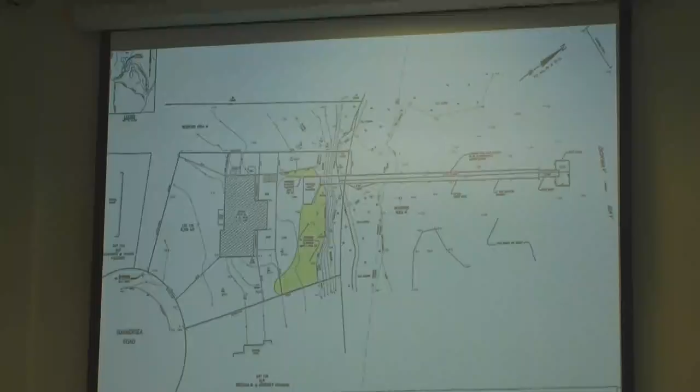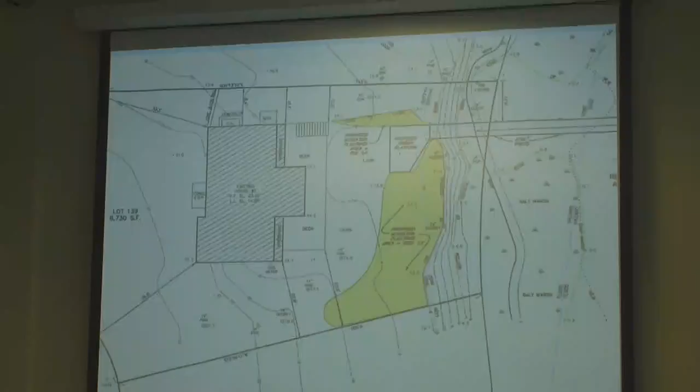And the previous plan shows the mitigation area there highlighted and the platform area. And again, just a close-up of the mitigation. But there was no detailed plan at the time as far as what the mitigation is comprised of. So that's what you have before you tonight, this plan that actually shows a detail of what's to be proposed.

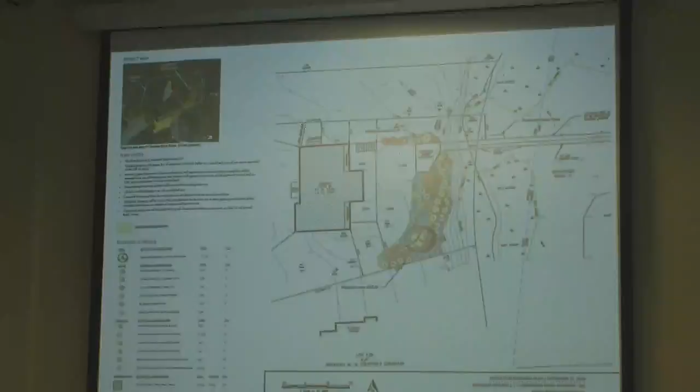If the commission finds it acceptable in exchange for a platform that is wider than 4 feet, which exceeds the requirements under dock and pier fixed pier width. The difference in this particular application compared to an application that has a deck halfway down the walkway or something similar out over the water, out over the BVW, out over the bank, is that this is landward of all of those resource areas, in an area that is currently just grass and turf.

So in looking at this, I think the reason the commission afforded an opportunity to look at a more detailed planting plan in exchange for this, even though it's not really something you've approved in the past, is that the exchange in this case may result in a real net benefit of providing a buffer to the top of Coastal Bank where there just really isn't any currently. So that's just to bring you up to the current proposal before you.

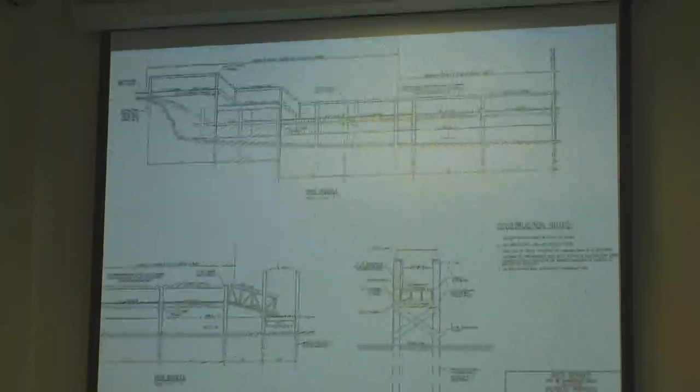And I agree, the planting list looks good. It's all native species and then a mix in of pollinator species. So overall, certainly a comprehensive list of mitigation plantings. And given what the impact would be from this platform, which is really negligible in my opinion, to what you're getting in exchange...

Is it permeable? I don't know. The platform, the decking will be the same decking that's on the walkway to the dock. It'll have gaps in the planking. There's no wetland vegetation under it, so it would just be standard decking like any residential deck, 3/4 inch spacing. You're not really protecting anything underneath it except lawn, so the spacing really comes into play when it's going out over resource areas like that. Oh, I'm just wondering if it's permeable, that's all.

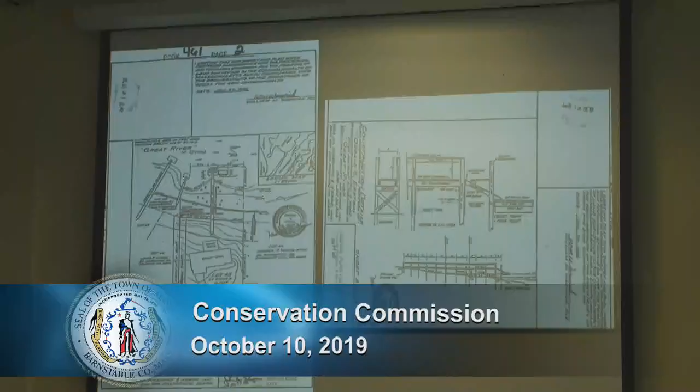That's not enough room for separation from the dock on the salt marsh, from the mean high water mark, the high tide line. That's the standard, that's the area where access is granted to the public. If you can't get underneath a structure, provisions have to be made to get up and over it, via access stairways on either side, removal of railings to allow public access up and over the dock and get by it without going around into the water. That's why it's at mean high water.

You need to add stairs to the dock so they can come up and walk over it. Correct.

Do we know when Mr. Cleary will be home from Florida? He's coming back, we're supposed to close on the 28th, so he's coming back, I think, the Thursday before that, so the 24th or something. So we should be back before our next meeting, should we choose to continue. When is the next meeting? Next meeting is two weeks hence.

October 24th, correct. I think he's coming back around then, but he did give me some stuff, I apologize I was late getting here, I ran from Boston, and I have some things he gave me at the house, so it's possible the registrations you're talking about are there, and could I bring them up to you?

Yeah, absolutely, we can review what documentation you have. If it's there, great. I would still recommend a continuance to allow time for that. Yeah, that would be great. So I'll bring you that documentation, and then how do we deal with the stairway thing?

So the commission, it seems kind of an odd approach under Chapter 91 to wait for somebody to file a complaint against a homeowner for lack of access. If that occurrence were to ever happen, it may be remote, it may not be, but it seems extreme when the commission can simply require access up and over to avoid that scenario. That's what I would recommend.

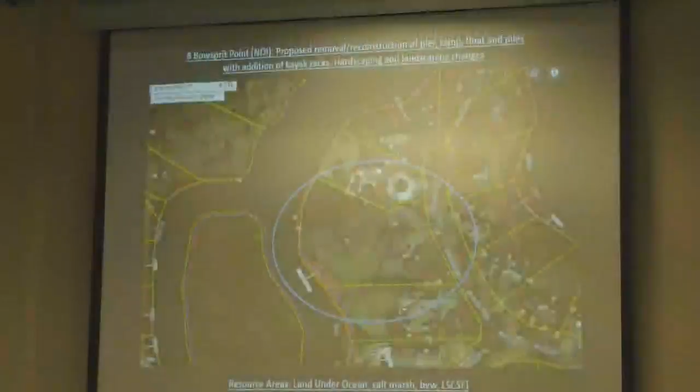Just to give you a quick recap, your resource areas for this project include land under the ocean, salt marsh, BVW, land subject to coastal storm flowage. This is a flood zone, this is an A zone. We're not in a velocity zone for this area.

Then there will be a retaining wall in this area. The walkway will extend to the top of the retaining wall, and then there'll be a set of steps down to the lawn area. You can see these stakes, I believe, are the BVW line. That wetland line actually is in the lawn area.

Prior owners had done this work, and there is an open order of conditions on the site for Phragmites eradication plan. This work was initially resolved through the order of conditions, and they are ongoing with the Phragmites eradication plan. It is effective at this point in eliminating the Phragmites in this area.

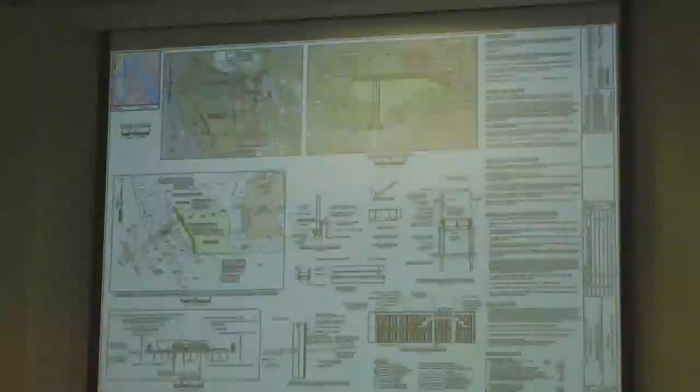What is the estimated height of the wall that you propose? It's about 26... 46 inches high. Good, just walking that property, clearly you need a good couple of feet. It's pretty low in there, and that Spinnaker Cove, when it floods, and probably this evening, you'll probably find that the water is up, or depending upon tides, will flood several feet up onto that lawn.

So I think this is a good proposal. So what makes it okay to put in a retaining wall where there isn't one now? Well, the purpose of the wall is really to protect for storm damage prevention. That's the key purpose of the wall.

So there was a letter from Marine Fisheries that commented on the dock, and they made known their concerns about migration of salt marsh and BVW in anticipation of sea level rise. So where the wall was originally located, I had recommended that it be pushed back to its current location. I think by virtue of doing that, you're getting it out of BVW. You're allowing for that sea level rise and salt marsh migration to happen naturally. You're eliminating lawn that was, for the most part, covering over BVW.

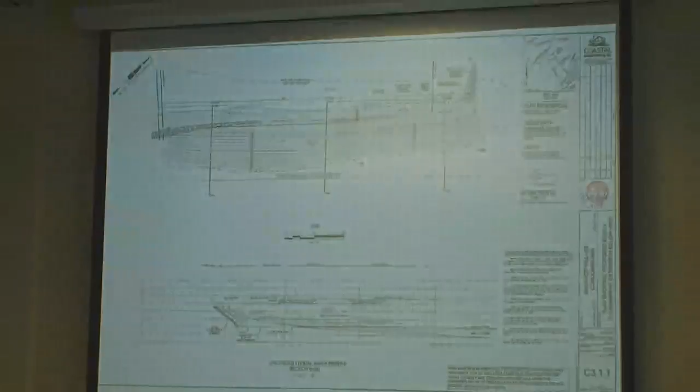The green line shows a flat section of the beach known as the berm with a 3-to-1 slope out to the water. From our experience, we've seen a 3-to-1 slope can cause a scarp over the beach because the steep slope allows the sand to fall off, and as water hits it, it's almost like hitting a wall, causing more erosion. We've designed a new profile with a 1-on-10 slope down below the mean high water line, which allows water to move up and down the beach and hopefully limits erosion.

The new profile compared to the green profile from 1995 kind of balances out the amount of nourishment that would need to be placed. I was able to generate that original profile, the green line, on the computer program and figure out how much volume would be required to fill that template. I redesigned a new template with a more gradual slope that we've had more success with in beach nourishment projects, and I tried to maintain that same volume.

The volume to the original profile was about 13,900 cubic yards, and the new proposed volume is about 14,200 cubic yards. Another thing I wanted to make a point of is that the condo association is going to continue to at least place their required nourishment every season based on the survey. They're also very concerned with the status of their beach, and they've called it the pride of their property and their most valuable asset.

They want to do anything they can to maintain the beach and keep it around. So there might be some years where a lot of nourishment is needed to redevelop this proposed profile. There may be some years they want to place the full quantity to reconstruct the beach as shown here, some years they just stick with their minimum requirement, and some years the beach may naturally gain sand, but more likely than not there's going to be a loss of sand.

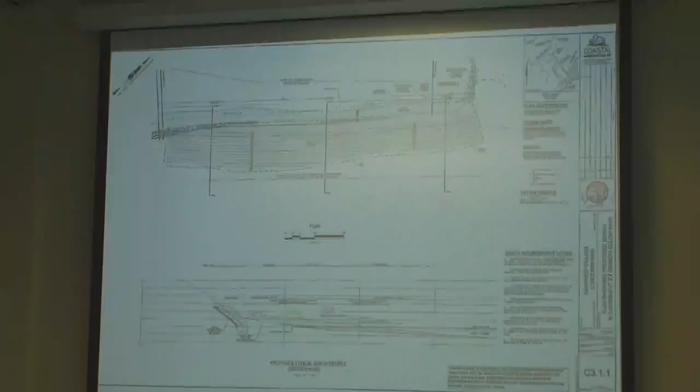Just to add on to the input on the regulatory authorities for this. This was issued a DEP number, so it was opened. Also, two state agencies, Division of Marine Fisheries and Natural Heritage and Endangered Species Program, submitted comment letters for this. Marine Fisheries identified the area as not containing shellfish, which is their primary concern, so they signed off on it.

Natural Heritage and Endangered Species Program also issued a letter of no-take status regarding shorebird habitat, their species of special concern out there. In fact, the letter mentioned that the addition of sand into the intertidal area below mean high water would actually be a net benefit for shorebird habitat. So they also signed off on this project.

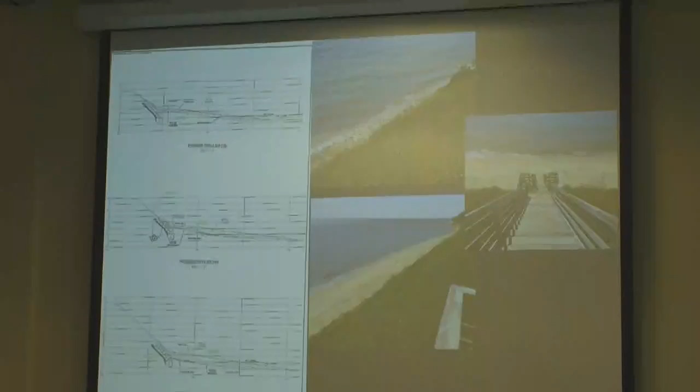As it meets the beginning of the series of revetment walls on Triton, that's really where the profile is almost gone. It's just a matter of time, if nothing is done, that the mean high water will reach the base of the wall and the profile will be gone, and you can't reestablish it after that. So I think it's definitely an improvement, and these measures will hopefully help reestablish the profile, particularly in that area, and save the profile of the beach moving forward.

So all relevant agencies have signed off on this, and I don't have any other comments. I would recommend we close and issue.

Does anyone in the audience have any comments or questions?

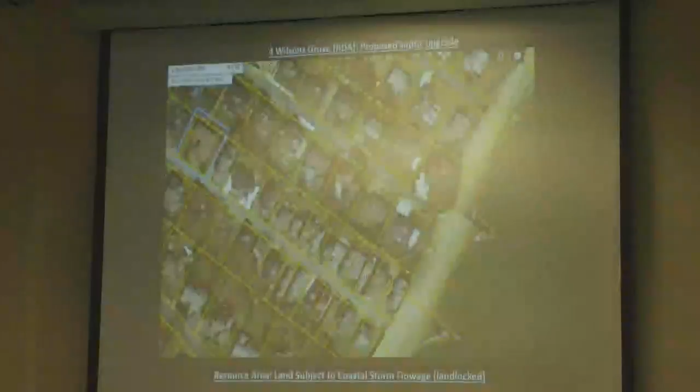So Board of Health has received the application under review. Just like was described, it's a landlocked lot in the flood zone. Going back to the satellite, you can see it's pretty set, well outside of any other resource areas, which would be coastal bank, coastal beach, coastal dune. So it's simply land subject to coastal storm flowage. All work being contained within the driveway layout as was described, and just some photos to show that area.

Does anyone in the audience have any comments or questions? Motion for negative determination for the proposed septic system upgrade at 4 Wilson's Grove. Second. All in favor? Aye. Approved. Thank you.

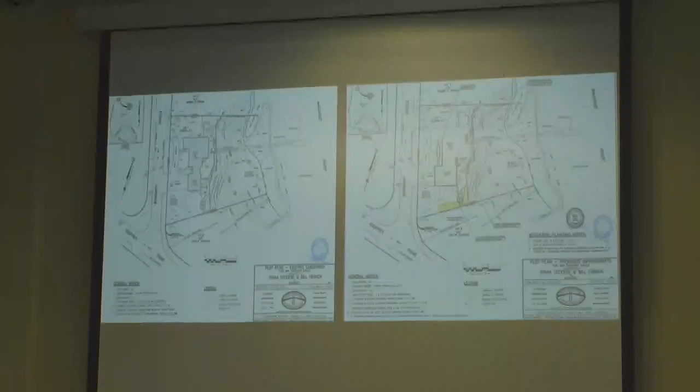And we're proposing the plants to be used to be arrowwood viburnum, or an alternative if the commission staff doesn't think that's appropriate for this area.

That pretty much sums up the project. There's no impacts to the wetland resources. It's a modest renovation to the house, and we're hopeful you can issue an order of conditions. And I'm happy to answer any questions.

How many viburnums will be installed? It just says it will be that plant, but it doesn't specify how many will be in that 500 square feet. I specify the size and the spacing of the plantings. I didn't actually count out how many would be needed for that. I can figure that out if you'd like and submit it.

Well, that's probably up to Drew. I mean, you can go by if you got the square footage of the mitigation area and you know what gallon size the nursery has available, 1 or 2 gallon are typical nursery gallon sizes. And then there's typical spacing requirements depending on the gallon size. So I don't think it's necessary to come up with an actual count based on all that other information.

I would recommend maybe mixing it up with a couple of different alternative plantings, just so we have a little diversity in there. It's not just one type of shrub. But we can certainly work to figure that out. Be happy to take your recommendation.

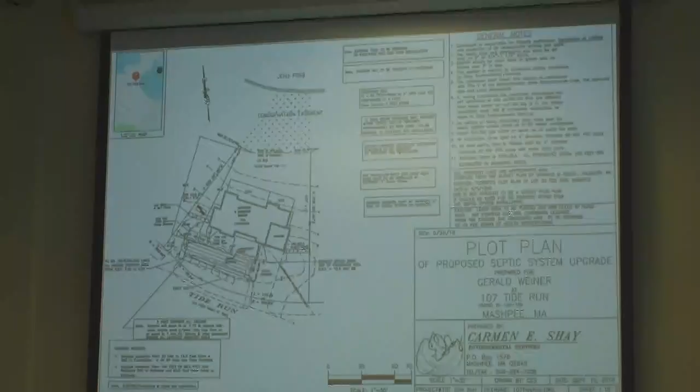Two people here. Long time no see. Afternoon. Good evening, I should say.